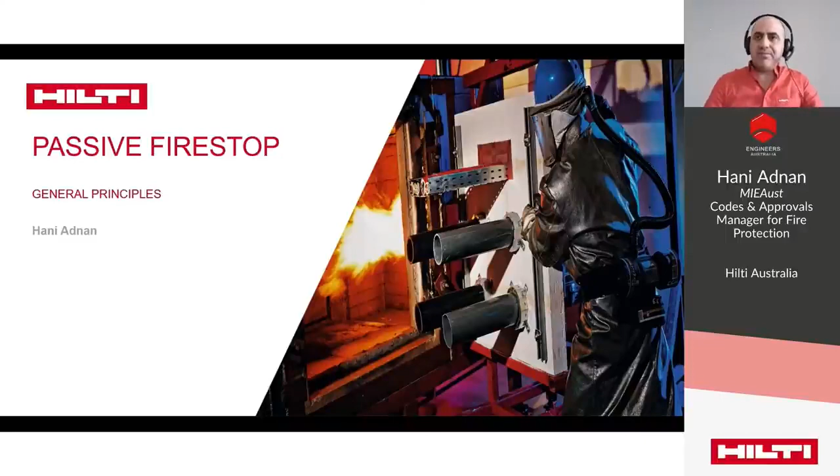Here, considering the hazard associated with these openings, as you know, the sea will begin to flow into the ship, causing a high safety risk. This will surely affect my choices, as safety comes always first and before any other objectives. And absolutely, nobody wants to end up in a sinking boat.

Now, same in relation to building construction. Openings in walls and floors have another set of hazards associated with them, such as the spread of fire, the spread of smoke, general stability, and so on. However, the objective remains the same: saving lives, protecting assets, and improving structural performance.

Now, passive fire stopping systems highly depend on the compartmentation designs. The compartmentation, or what sometimes people call fire zones, is a globally applied principle for fire safety. It's well covered as well in the National Construction Code 2011 under Part CP2, where every building will be constructed in such a way that in the event of fire, flames and smoke are limited from spreading within the building.

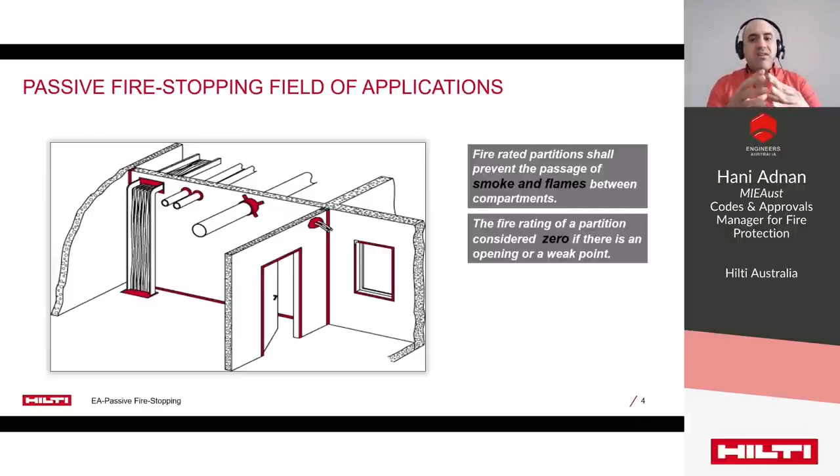Now, as you're all aware, services, utilities, and construction joints sometimes penetrate fire-rated walls or sometimes penetrate fire-rated floors. These openings are weak points that can affect the overall performance of the fire compartmentation if they are not sealed. Passive fire stopping materials play a big role here to close these penetrations and to maintain the original integrity of the designed fire compartmentations.

Passive fire stopping can be divided into three different categories. The first one is a through penetration, basically an opening in a fire-rated assembly, such as a fire-rated floor or wall, where services passing through need the integrity of the wall or floor to be maintained.

The construction joint is the second type, and it's basically any joint, whether static or dynamic, between two fire-rated elements. For example, joints between floor-to-floor configuration, wall-to-wall configuration, or the joints between the floor and the head of wall configurations. These first two, service penetrations and construction joints, are well covered in the NCC under the deemed-to-satisfy provisions C3.15 and C3.16.

The third category is perimeter joints, sometimes called curtain wall joints. Again, it's any joint, whether static or dynamic, but this time between a fire-rated floor assembly and a non-rated exterior wall assembly. Unfortunately, we don't yet have any deemed-to-satisfy provision for it in the local building code, nor a local testing standard procedure, although international testing standards exist, such as American standard ASTM E2307 or European standard EN 1364 Part 3 or Part 4.

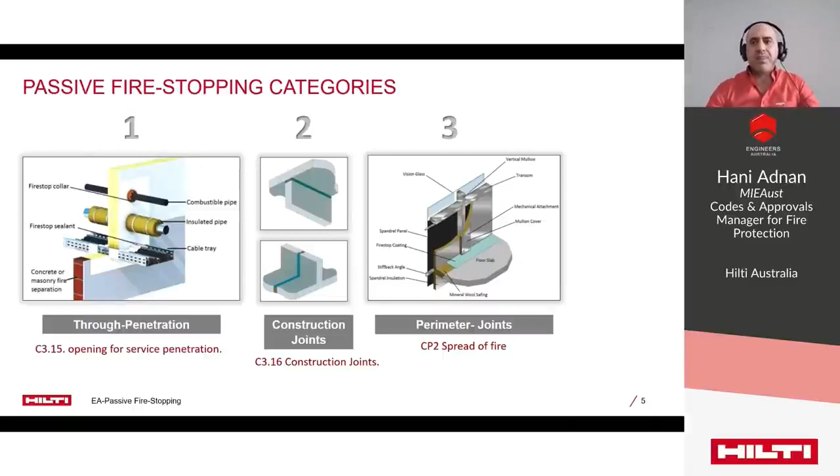Now it's also important to define the fire resistance level. Fire resistance level, FRL, as defined in the National Construction Code, is grading periods in minutes determined in accordance with Schedule 5 - we'll cover Schedule 5 later - for the following criteria: structural adequacy, integrity, and insulation.

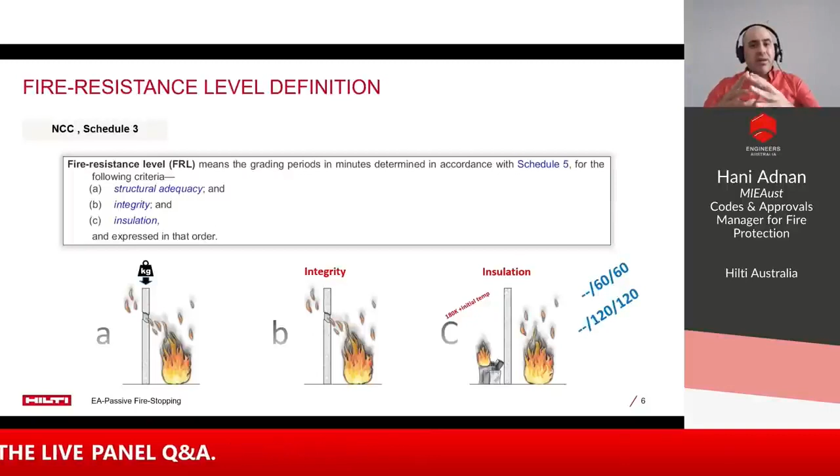Structural adequacy means the ability to maintain stability of the load-bearing capacity when we do the fire test as determined by the testing standards. Integrity means the ability to resist the passage of flames and hot gases as specified in the testing standards. And finally, insulation means the ability to maintain a temperature on the surface not exposed to the furnace - the temperature on the other side of the fire should be maintained below a certain limit specified in the testing standards.

Now, with regards to passive fire stopping systems, it doesn't require a structural adequacy rating, as it's not considered a load-bearing element. Therefore, it shall have the second and third gradings, integrity and insulation rating.

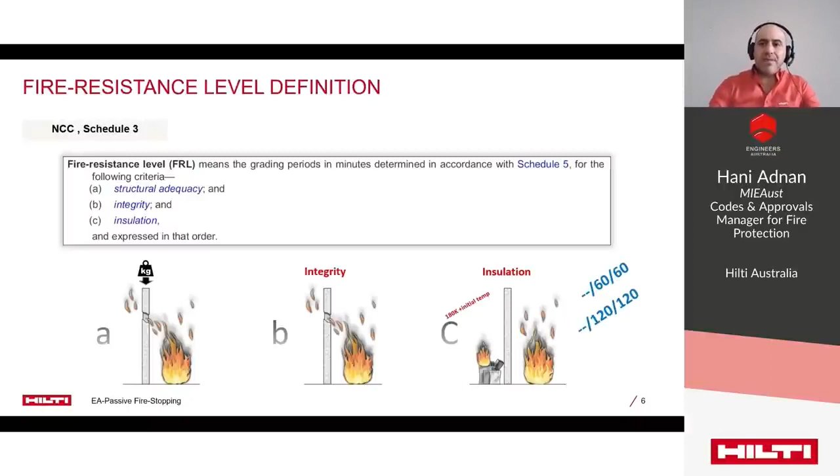A fire test is basically the way of determining whether the fire protection product meets a minimum performance criteria as set out in the building code or other applicable legislation, and must be conducted in laboratories holding national accreditation for testing the same type of application. For example, the accreditation body here in Australia is NATA.

Also, additional safety measures are mandatory in some standards. Take the American standards as an example - ASTM E814, which is equivalent to AS 1530 Part 4, used for through penetrations. It requires what's called a hose stream test, applying highly pressurized water on the tested specimens following the fire test, to measure the level of impact resistance of that burned sample, which makes it really hard to pass this standard in general.

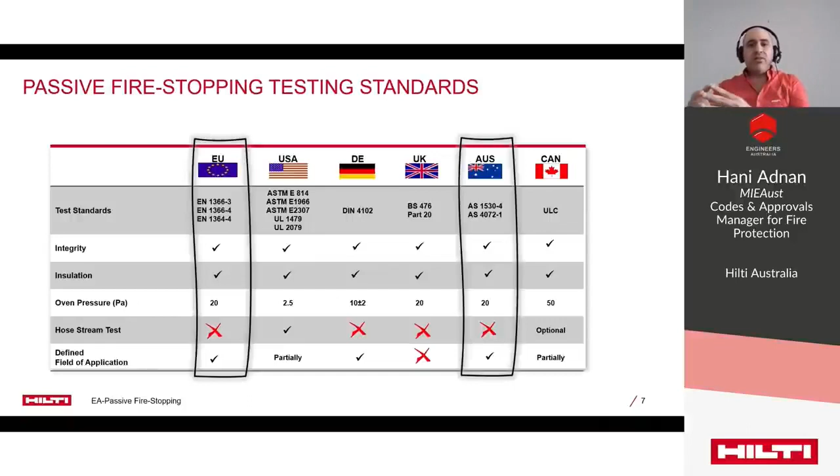In Australia, the first important testing standard for passive fire stopping systems is AS 1530 Part 4, method of fire test on building materials. The scope of this standard is to provide a way of determining the fire resistance level for different building elements, including passive fire stopping systems, to provide a uniform set of heating conditions and testing procedures for stakeholders. The testing works by exposing specimens to heat under controlled conditions in a furnace. The elapsed times at which various failure criteria occur are recorded, and then the fire resistance level of the tested building elements can be reported.

This is the first standard. Now the second important standard is AS 4072 Part 1, which sets out the minimum requirements for construction, installation, and application of fire resistance test results, specifically for service penetrations and control joints. This standard must always be used in conjunction with AS 1530 Part 4. Basically, AS 1530 Part 4 sets how to do the fire test, and AS 4072 sets how to utilize and apply the results. AS 4072 also provides the basis for permissible variations and assessment requirements. In short, AS 4072 Part 1 provides the field of application rules for what's being tested to AS 1530 Part 4.

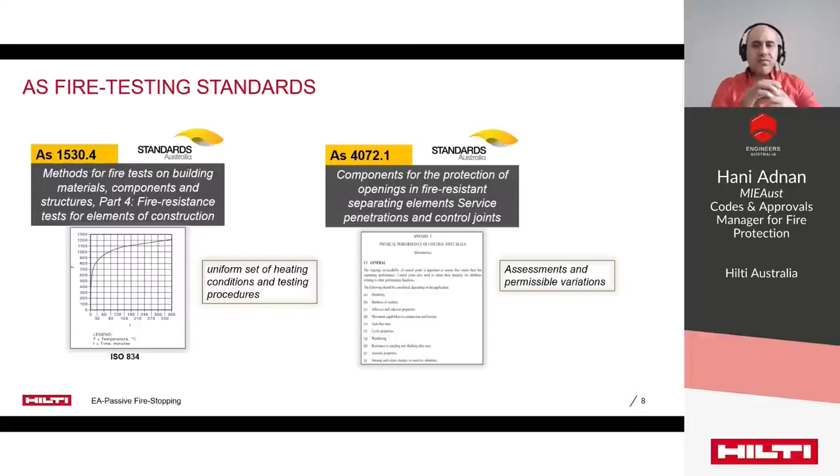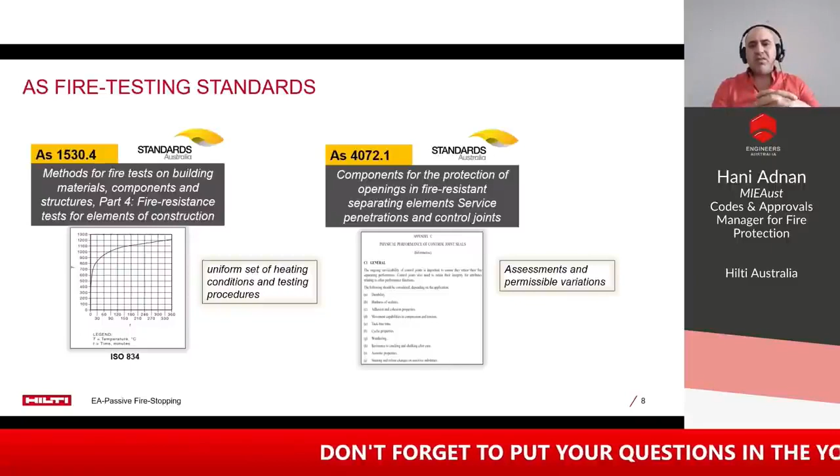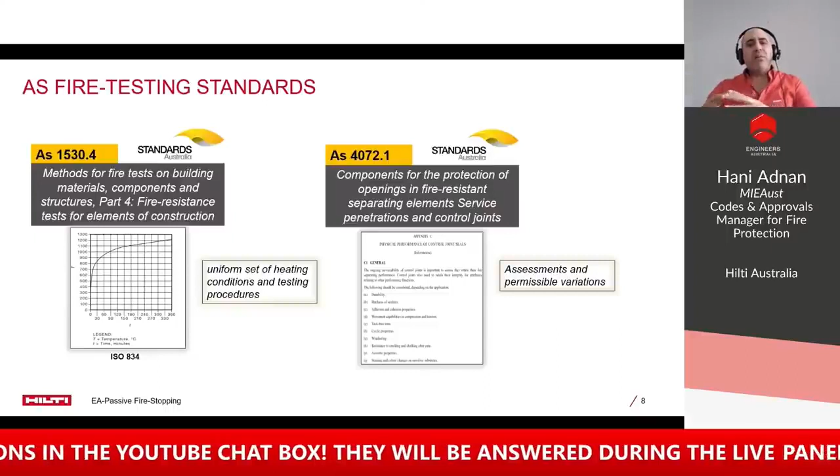Finally, standards like AS 4072 Part 1 have another important informative section we shouldn't overlook, such as Appendix C, physical performance of control joint seals, which provides more details on additional requirements beyond fire resistance testing for those sealants. This appendix will be covered later on in today's webinar.

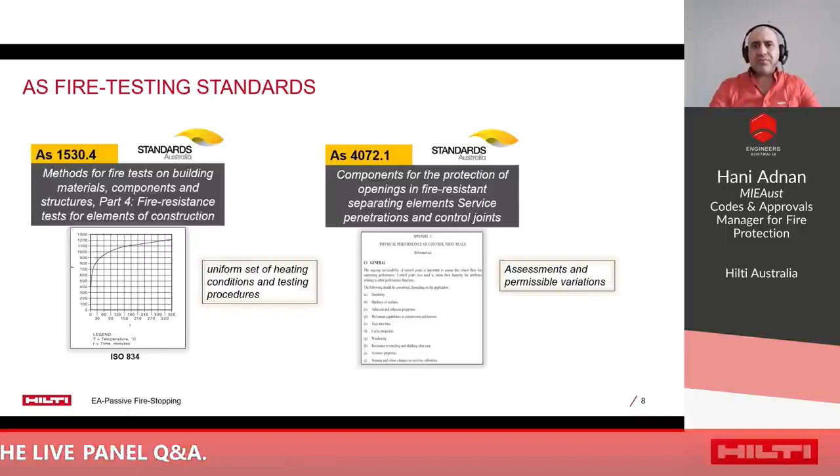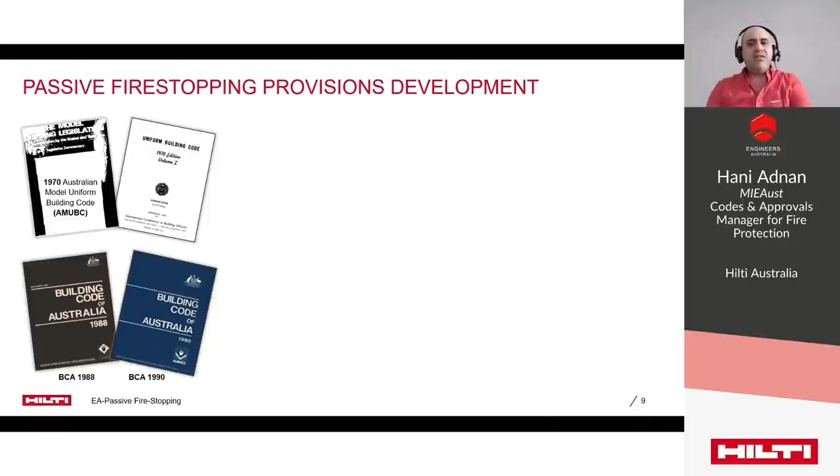Fire stopping provisions in the current NCC are a result of many years of progressive development in this field. In the 70s, building code development in the United States, Canada, Australia, and Germany began reflecting interest in fire protection in general, providing basic design requirements related to compartmentation rules, recommendations on using non-combustible materials, and special recommendations such as the use of a protected shaft to pass combustible services like cables and wires.

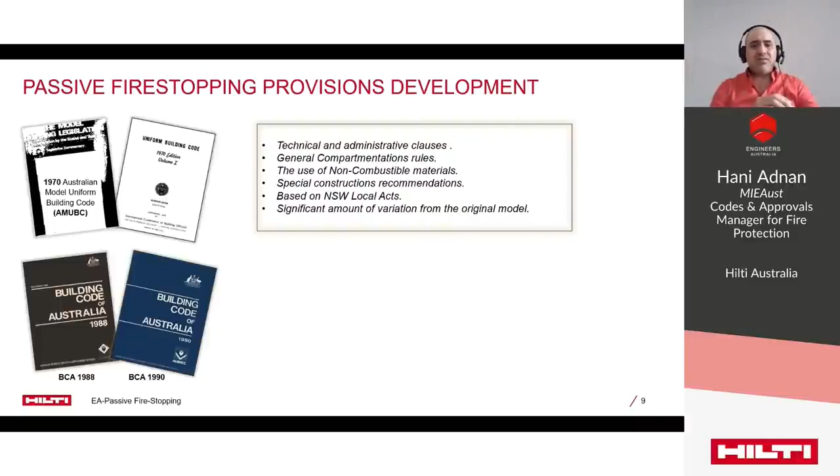The Australian Uniform Building Code was based on the New South Wales Local Government Act, which caused a high amount of variation from the original model, with many states and territories changing the provisions to meet their local needs and legislation. There was a clear need for a nationally harmonized building construction regulation, achieved with the first edition of the Building Code of Australia, BCA 1988, further refined in the second edition, BCA 1990. This code improved many aspects such as compartmentation and building classification rules. This code also introduced Part C, which we still have today, for the fire resistance of building elements, with a specific clause for openings for service installations in C314, and deemed-to-satisfy solutions in Part C315.

At that time, one of the main challenges for passive fire stopping application was the variation between what's being tested and the actual site configuration at the project. This is the reason why AS 4072, which we talked about earlier, provides field of application rules - for example, you test a certain configuration or size of cables, then apply that test result to other types or sizes if applicable.

AS 4072 was published only in 1992. At that time, it was really hard, or even impossible, for manufacturers to test each single parameter and configuration on a job site to AS 1530 Part 4. This left a big room for individual opinions, via sorts of judgments and opinion letters, to confirm these kinds of variations. However, these challenges were sorted out in the following editions of the BCA and the National Construction Code by referring to AS 4072 Part 1 directly.

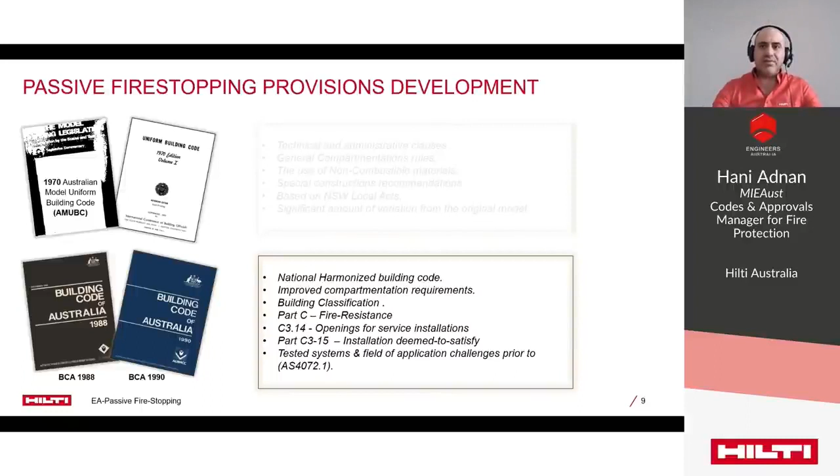Moving forward, in 1996 we had the BCA 1996 as the first performance-based code in Australia. This code set the objective and the performance requirements that must be met. These performance requirements, by the way, exist in our current NCC. I'm talking here about the NCC 2019 as well.

BCA 1996 included a performance requirement, CP8, related to both service penetrations and construction joints. It stated that any building element provided to resist the spread of fire must be protected to the degree necessary so that an adequate level of performance is maintained when openings, penetrations, and construction joints occur. And by the way, we still have the exact same performance requirement with no change in our NCC 2019.

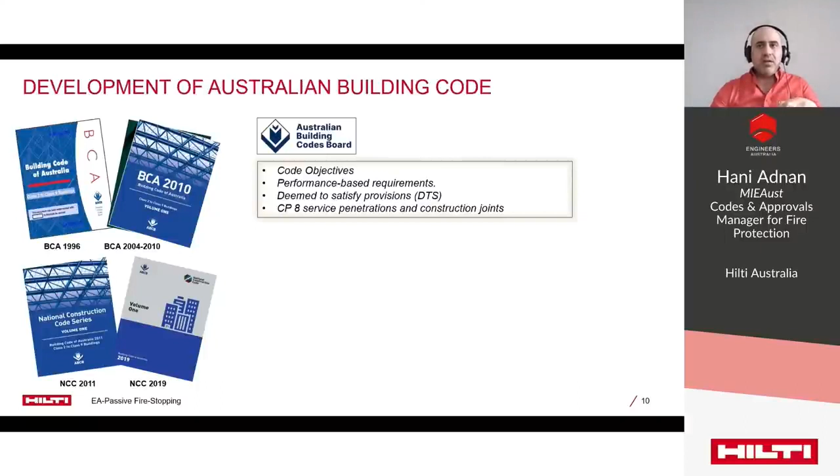Now, moving forward, before 2011, the Plumbing Code of Australia, or the plumbing regulation in Australia in general, had been developed in alignment with the state and territory water and sewerage authorities. And most regulations were based on British standards and requirements.

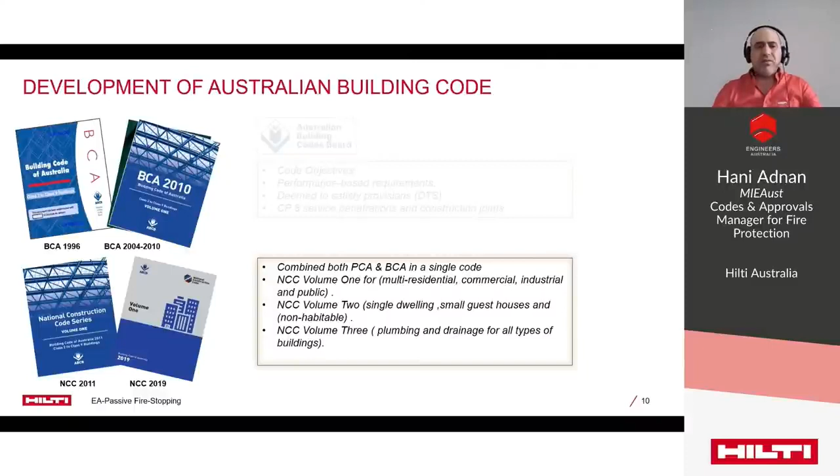Then in 2011, both the Plumbing Code and the Building Code came into one single code, the NCC 2011, with 3 volumes. Volume 1: multi-residential and public buildings, which is highly relevant to passive fire stopping systems. Volume 2: small and single dwellings and non-habitable buildings. And finally, Volume 3 applies to plumbing and drainage for all types of buildings.

Now, if we look at the National Construction Code today, the NCC 2019, in comparison to the first release version of the BCA, it had a major improvement from all aspects with regards to the regulations of passive fire stopping systems. It also has an improvement in terms of the accepted evidence of suitability and the assessment methods. I'm not going to cover this now, as it will be part of other sections of today's webinar.

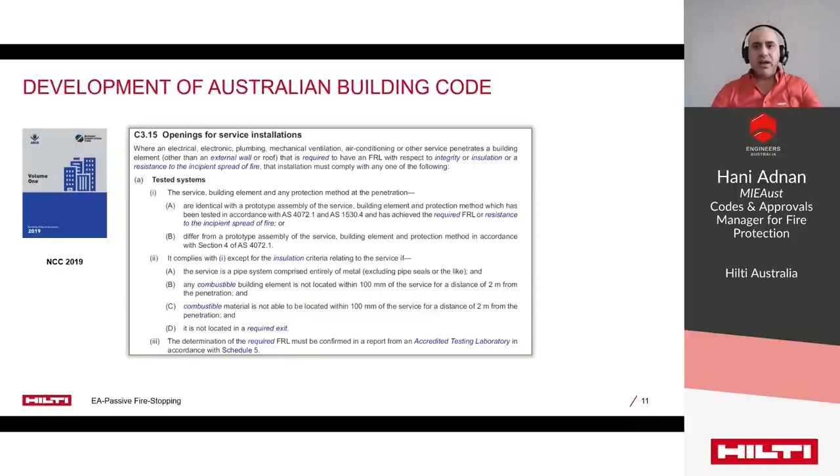But I wanted to highlight this extract from a deemed-to-satisfy provision, C315, openings for service installations, tested systems, which clearly defines the field of applications, compliance requirements, and the reference standards. It refers primarily to AS 1530 Part 4 and AS 4072 Part 1. This DTS helps manufacturers, designers, and certifiers refer to a comprehensive document to maintain code compliance solutions while providing a design or even reviewing passive fire stopping proposals.

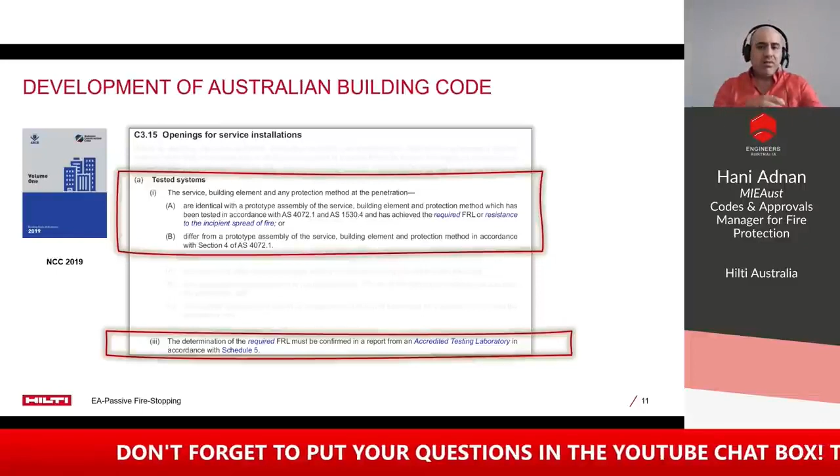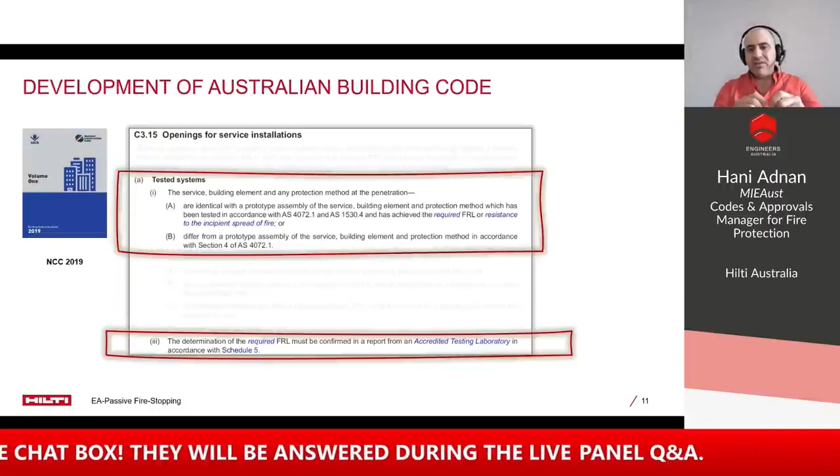This NCC also includes deemed-to-satisfy provisions for ventilation and damper systems, and a specification DTS path for passive fire stopping systems, which was basically carried forward from the previous Australian codes, providing more flexibility and more choices for compliance paths.

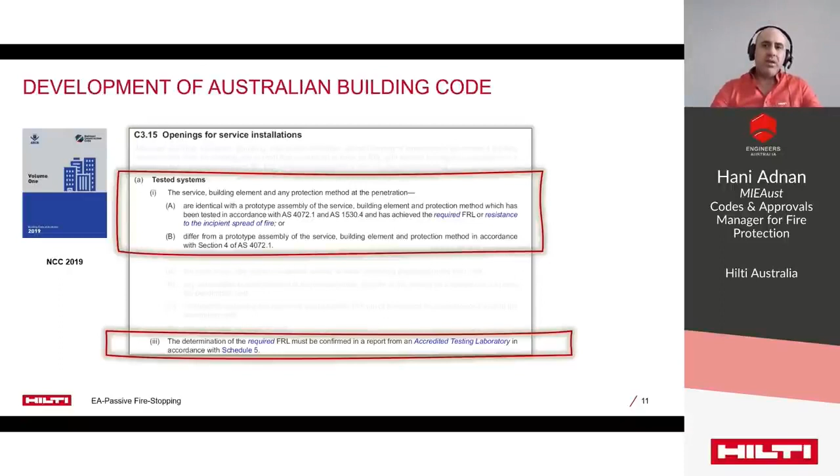But finally, I really want to say thanks to Schedule 5 in the NCC, which sets out the procedure for determining the fire resistance level of building elements and helps reduce judgments and opinions in this field, moving more towards a testing and assessment approach, where basically a building element meets the requirement of this schedule if it is identical with a prototype that has been submitted to the standard fire test or an equivalent or more severe testing standard. The system must be confirmed in a report from an accredited testing laboratory.

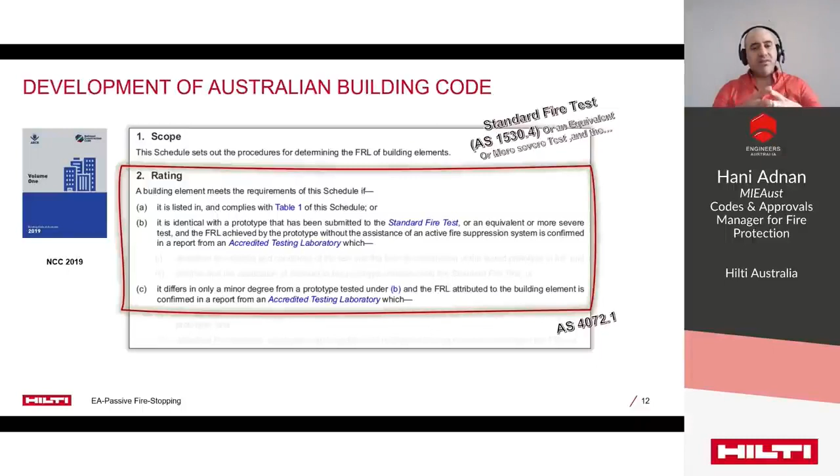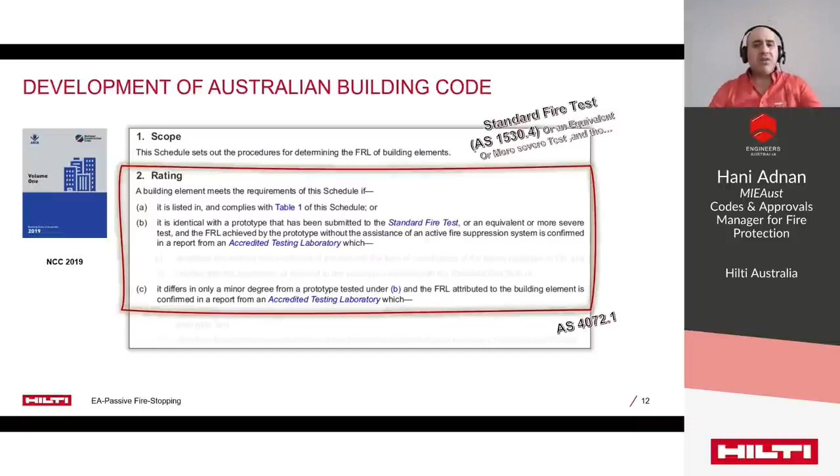If the fire test differs in minor degree from the prototype specified, then the fire resistance level still needs to be confirmed by an accredited testing laboratory. And as we said earlier, such allowable permissible variation rules can be found in AS 4072 Part 1.

What has been presented in the previous slides are just some of the key elements and key milestones, and for sure we didn't cover the entire reform in the passive fire stopping regulations. A lot of great work happened in the past decades, and there is still need for more development and enforcement in coming years, especially with regards to design, installations, conformity, and third-party approach.

But only one thing didn't change and won't change over the years, and that is the objective of saving lives, protecting assets, and improving building performance through a balanced fire protection approach, utilizing the different types of fire protection measures in order to enhance the fire safety level.

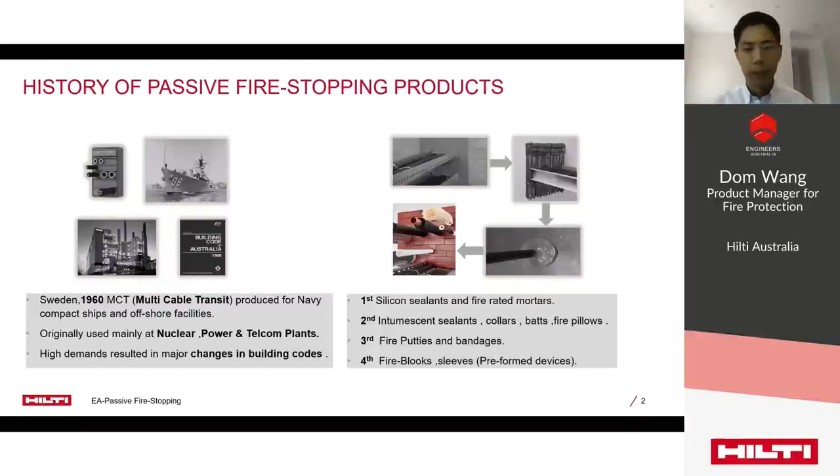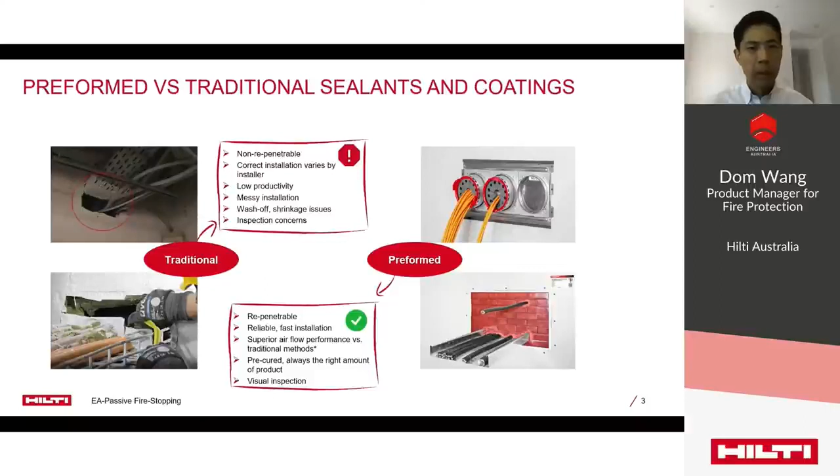For example, on the left we see more of a traditional practice in dealing with cable penetrations. Pillows and coated mineral board are usually used here, where preformed devices have been developed for the same application. Comparing to the traditional practice, the engineered preformed solutions generally provide higher quality of installation, are more reliable, easier to inspect, and result in less wastage.

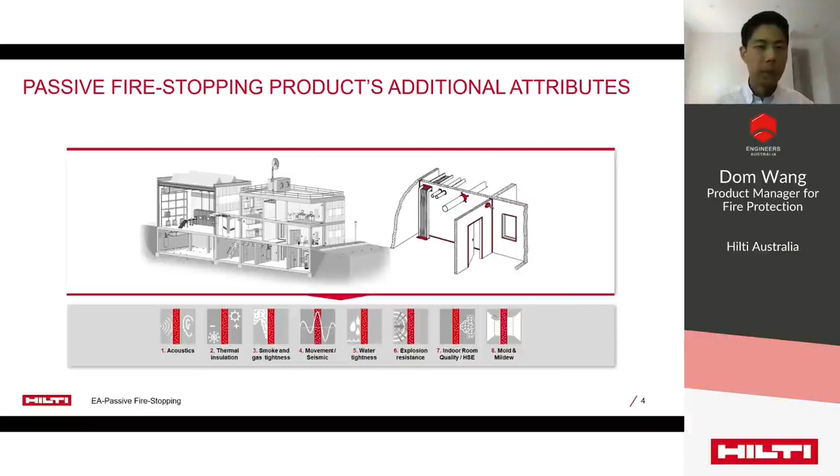The firestop product can contribute beyond fire rating. The new generation of products are developed to bring in additional attributes, which can add great value to projects. These projects can be standard ones like residential and commercial, or more sophisticated ones, for example healthcare projects and data centers.

The local standard is also calling for additional attributes for firestop products. Appendix C of AS 4072.1 is sometimes overlooked when selecting firestop solutions for construction joints. This informative section states that construction joints need to retain their integrity for attributes relating to other performance functions, including, for example, durability, adhesion, acoustic property, and also very importantly here, what we're going to talk about, movement and cyclic property.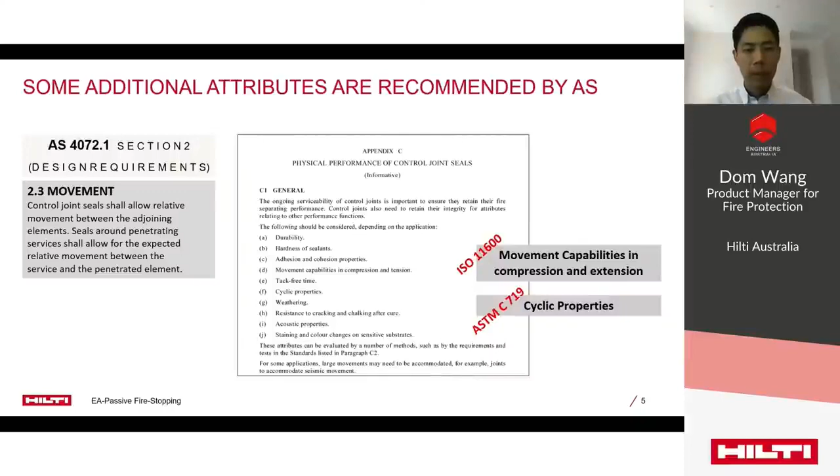The standard provides guidelines on some international standards which cover additional attributes, such as ASTM C719, standard test method for adhesion and cohesion of joint sealant under cyclic movement, and also ISO 11600, building construction jointing products, classification and requirements for sealant. The same standard also recommends the following: sealant around the penetrating services shall allow for expected relative movement between the service and the penetrated element.

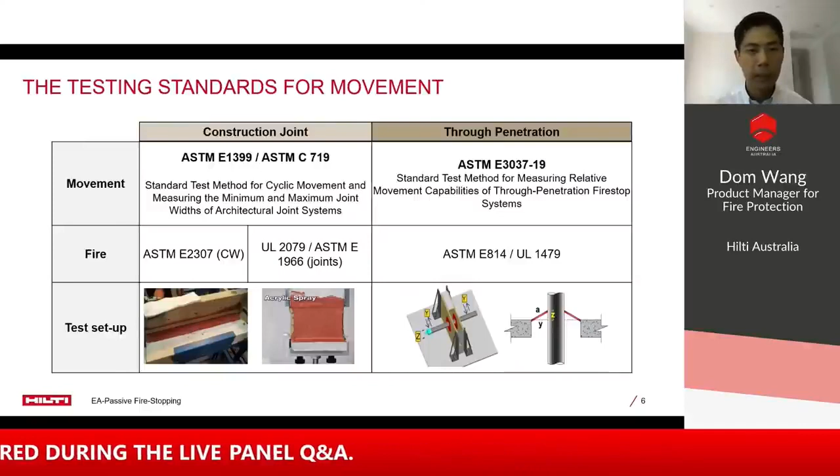So here's the list of testing standards for movement. For construction joints under ASTM setting, the movement tests need to be done in accordance with ASTM E1399 and also ASTM C719, the standard test method for cyclic movement for architectural joint systems. Movement testing is mandatory under ASTM setting, and the same movement-tested specimen will then be loaded into a furnace for the fire test.

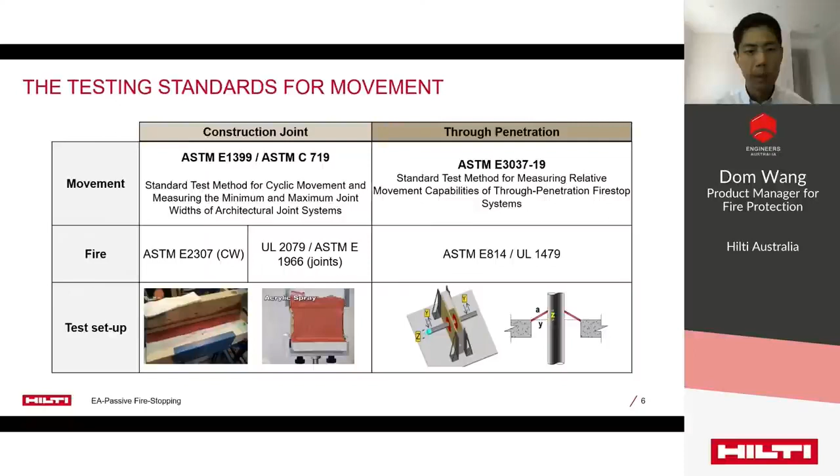ASTM E3037-19 was developed a few years ago for assessing relative movement capacity of through-penetration firestop systems. The standard is not mandatory, but this is the only available movement test standard for through penetration. I hope to explain the standard a bit further in the next few slides.

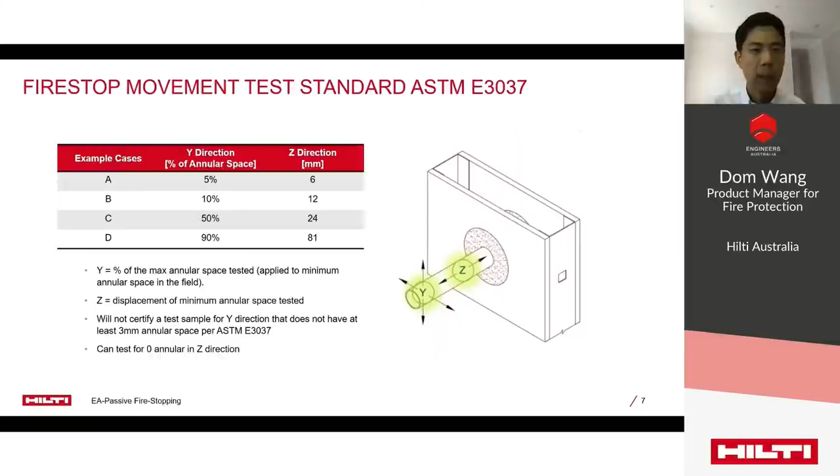So what do we mean by test conducted in 2 axes? This is a picture showing the test setup. We have movement in the y direction, which is left and right on the page, and also movement in the z direction, which is perpendicular to the separating element, creating shear strength on the test product.

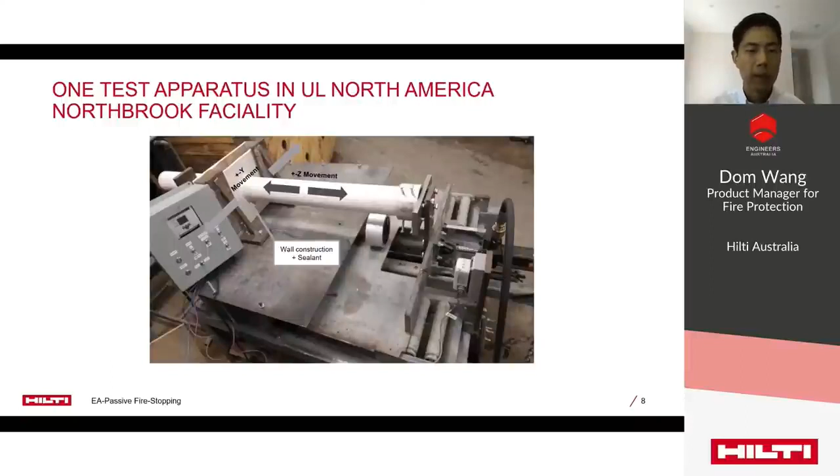Once the fire reached 150 to 180 degrees Celsius, around 2 minutes under the standard fire curve, the intumescent will start to expand and exert pressure on the combustible plastic pipe. The intumescent will grow and fill the full opening and harden to a more rigid char, completely blocking the opening, hence achieving the firestop performance.

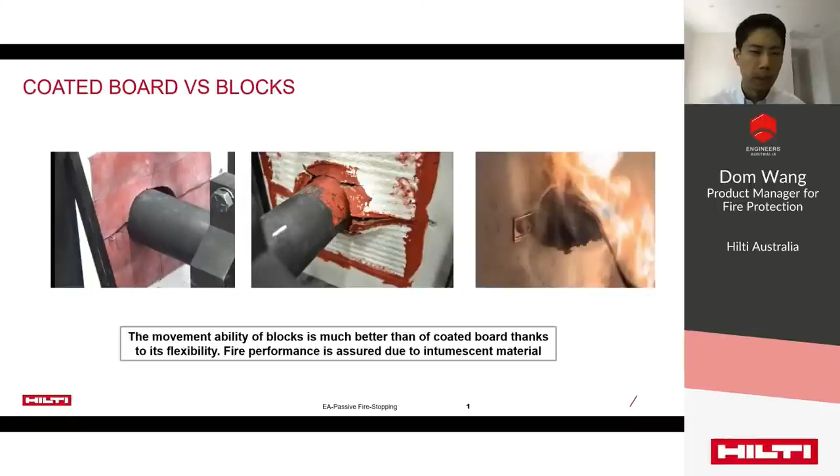In addition, if we consider data center and healthcare projects, mineral wool fiber from the coated mineral board is not designed to contribute to the clean room class. We can see that the tests in the lab show the re-penetration points risk exceeding the limit.

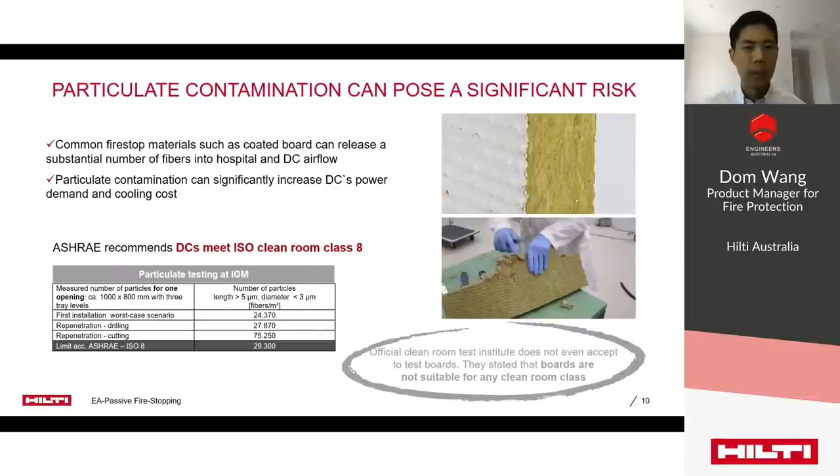The second additional attribute we would like to discuss today is the air leakage, also called the L rating. The most internationally recognized test standard for air leakage rating for through-penetration is Part 6 of UL 1479. The air rating measures the air movement through the fire assembly at ambient air temperature around 24 degrees Celsius and at an elevated temperature around 204 degrees Celsius.

The internal air pressure remains at a constant 74 pascal, and the movement of air that leaks through the firestop system is measured. According to the standard, the L rating should not exceed 5 cubic feet per minute per square foot. A rating less than 1 means good, best performance, whereas an increasing number means a decrease in sealing performance. Air leakage test is an optional test.

However, manufacturers can use this test to demonstrate the product's capacity in preventing smoke and air leakage. The L rating can then be used in product specification for healthcare and data center projects, where airflow is very essential.

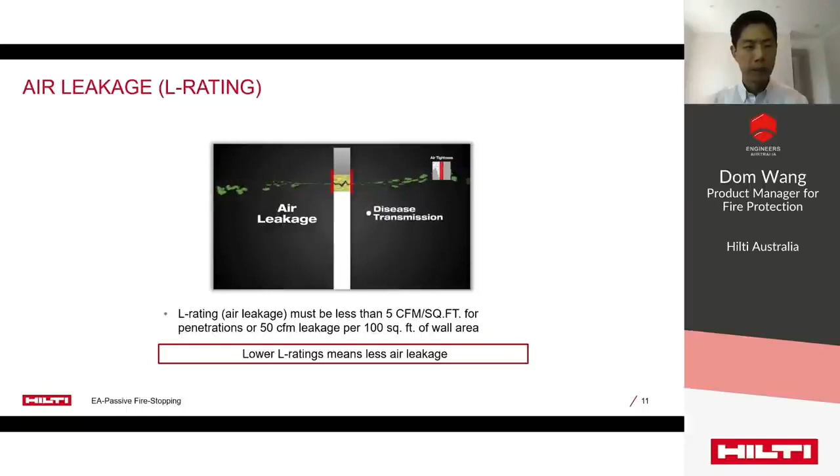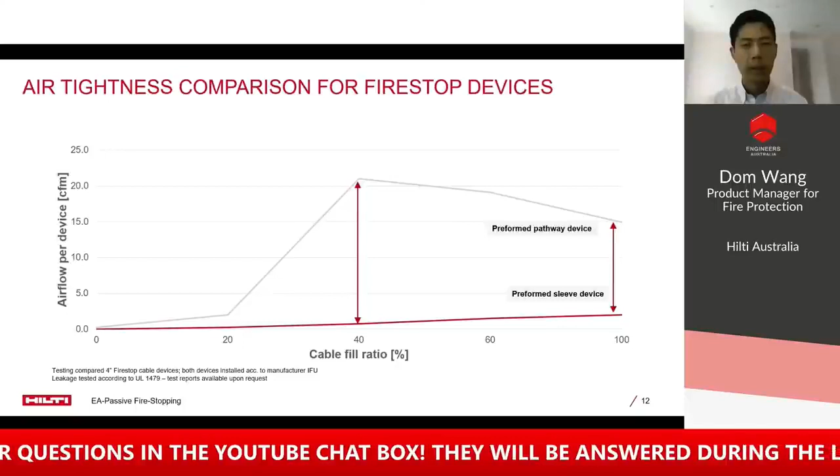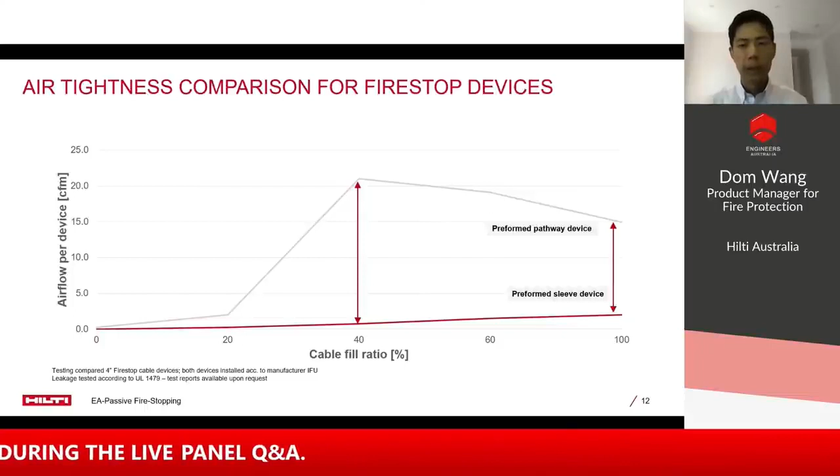The graph shows a quick air leakage test comparison between a preformed pathway device and a differently designed preformed sleeve device. As you can see, when there's no cable running through the device, both systems have very similar low air leakage rating, less than 1. But when more cables are added to the device, the air rating of the pathway device starts to climb, hence a decreased performance in stopping smoke.

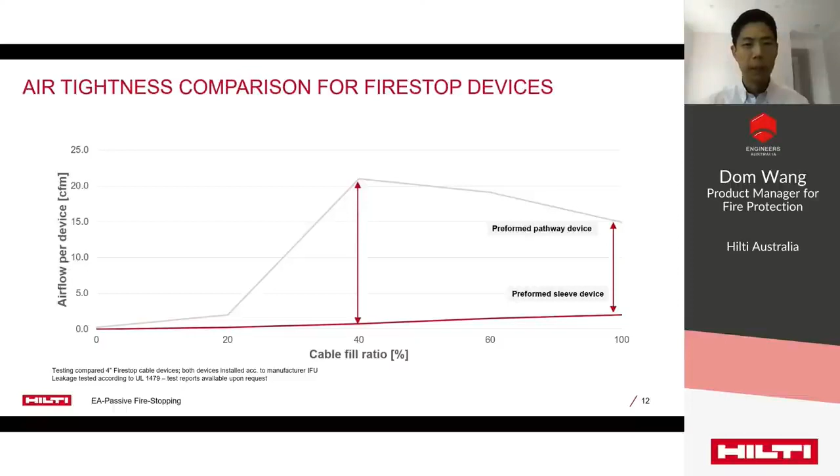In some cases, it also well exceeds the threshold of 5 cubic feet per minute. The preformed devices probably need more attention during the product development time and need to be properly designed and engineered to ensure that the product and solution is reliable and outperforms existing practice.

We also wanted to give our thoughts on firestop moving forward, as we see some great innovations locally in Australia in the past 10 years in the firestop space. And we have better enforcement now on code compliance. Apart from that, firestop solutions can be and should be more reliable.

For design, designers could more clearly define the requirements, for example additional attributes needed on the project, selecting the right products and solutions, and conduct more detailed planning. For installation, it can be carried out by trained and experienced installers, and on the product side, products can be developed to make installation easier with simpler mechanisms.

For certification, we already see documentation on digital platforms. What's probably going to happen next is how to cross-check with the design detail. All in all, the base to make our firestop solution more reliable is product conformity.

All right, thank you. That's my part. Thanks, Dom, for your insights.

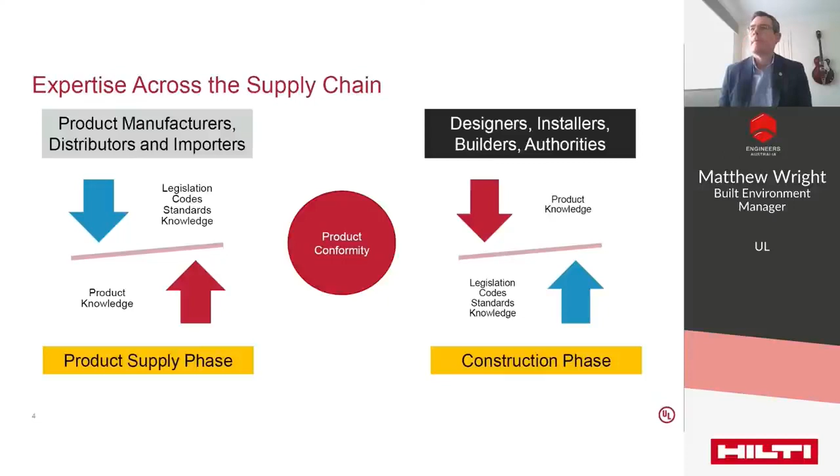However, currently a lack of confidence in this sector has emerged. The complexities associated with the supply chain, as well as regulatory expectations for product conformity, have drawn the attention of governments and industry stakeholders globally.

More focus has been applied in recent times as a result of reported product failures or incidents, particularly those associated with safety. Scathing independent reports in the UK and Australia have documented extensively the general lack of confidence in the successful implementation of codes and standards.

These reports have highlighted the importance of product conformity as the foundation of safety outcomes, which other measures like good design and the competence of practitioners rely on. If you can't trust the conformity of the product, it's difficult to have confidence in its ability to support the nominated holistic design and safety objectives it is intended for, no matter which other stakeholders are involved. Confidence in product conformity is important for all manufacturers, authorities, and end users.

You'll see on the screen here, there's two reports that I've nominated and a couple of links to those if you haven't seen them already. One's the Hackitt report from the UK, and the other is the Shergold-Weir report from Australia. Both are very consistent in relation to their recommendations and the issues that they've observed.

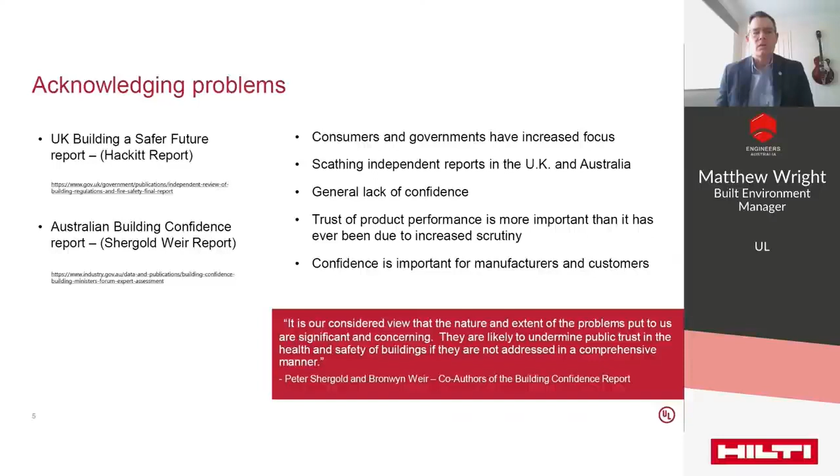There's a quote here from Peter Shergold and Bronwyn Weir, who are the authors of the Building Confidence Report, otherwise known as the Shergold-Weir report. They say it's our considered view that the nature and extent of the problems put to us are significant and concerning. They are likely to undermine public trust in the health and safety of buildings if they're not addressed in a comprehensive manner. So there's some pretty strong words in relation to the status of industry at the moment.

So here are two other quotes in relation to this from within the local industry. The first is from the Australasian Procurement and Construction Council's Guide to Achieving Compliance for Construction Products, and sums things up well: we're working in a global marketplace, there are many products that we're importing, and the most concerning consequence of construction product failure is its impact on safety. Without doubt, the use of faulty construction products puts lives at risk.

The second quote is from a Federal Senate inquiry in relation to non-conforming products, and is actually one of the recommendations of the inquiry. It calls for the Building Ministers Forum to expedite its consideration of a mandatory third-party certification scheme for high-risk building products and a national register for these products. We're not quite there yet in relation to that, but there is a lot of work happening in this space across state, territory and federal governments.

And there are some quite broad recommendations and discussion papers that have been produced by the Australian Building Codes Board in relation to this, if you care to look for those.

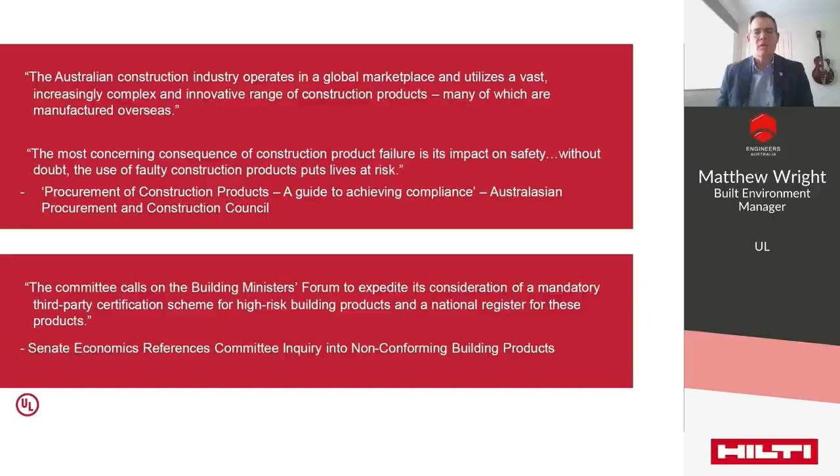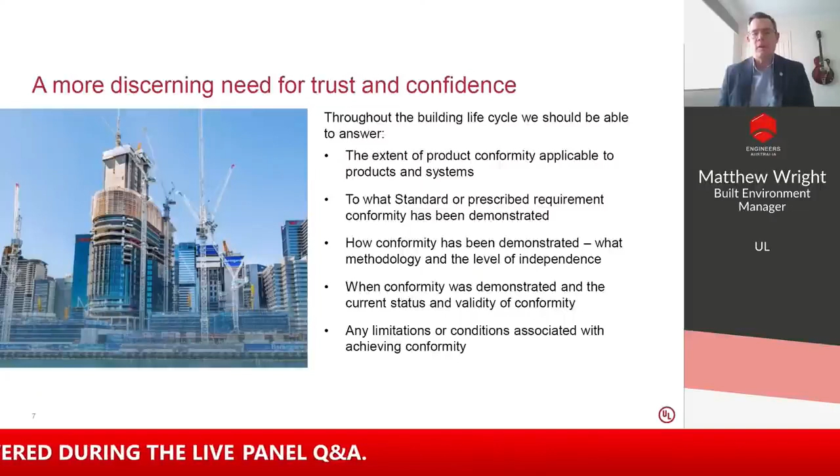Throughout the building life cycle, practitioners need to know: one, what level or extent of product conformity is required for products and systems made up of multiple products. Two, what target standard or prescribed requirement conformity has been demonstrated against. Three, what methodology has been used to demonstrate conformity and the level of independence applied. Four, the validity of any attestation of conformity - when was it issued, is it still valid? And five, are there any associated limitations with use of the product?

Right now, these questions are difficult to answer consistently for practitioners and require more education and attention.

Having outlined the broad issues, let's now shift to talking about why product conformity is the foundation of safety outcomes. Bear with me here while I change the slides.

Globally, one of the key focuses of built environment controls is to deliver improved safety outcomes that acknowledge certain measures can reduce or manage safety risks. Legislation can establish punitive or even criminal penalties if certain processes or approvals aren't sought or met. Regulations, codes and standards referenced by legislation typically outline design expectations, practitioner roles and responsibilities, and approval requirements. Design, construction and maintenance activities are tasked with implementing the expectations of approved design. Each of these measures works to reduce risk to acceptable levels. All of these functions call up or are supported by conforming product. None of these measures alone or together can achieve safety objectives without product that stakeholders have confidence will perform as expected.

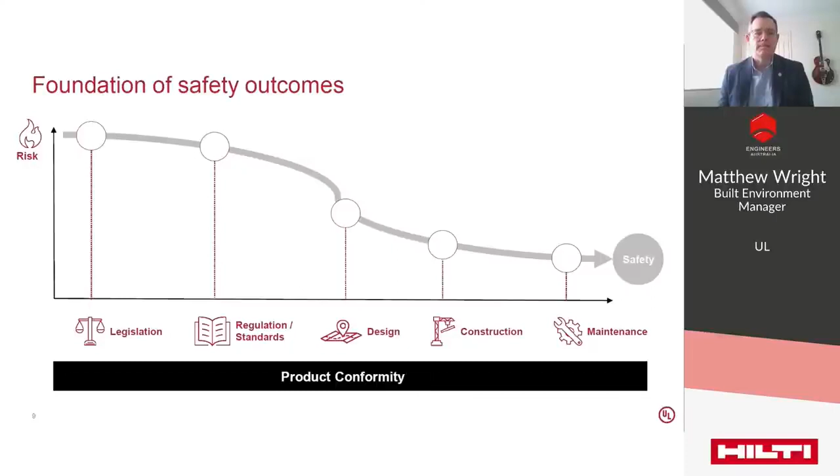Product certification is a key pillar for rebuilding trust around safety and compliance in buildings. Product certification is not to be confused with project certification or certification of an installation. It's certification of individual products or sometimes a system of multiple products.

The definition of product certification here is provided by the international standard ISO IEC 17067, Fundamentals of Product Certification and Guidelines for Product Certification Schemes. Let's read through the definition. Product certification is the provision of assessment and impartial third-party attestation that fulfilment of specified requirements has been demonstrated, and is an established conformity assessment activity that provides confidence to consumers, regulators, industry and other interested parties that products conform to specified requirements, including, for example, product performance, safety, interoperability and sustainability.

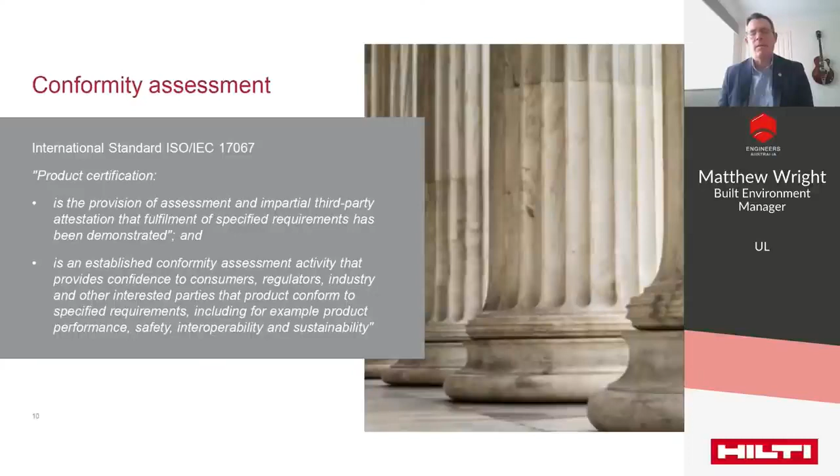The key points here are: one, impartiality - product certification is provided by someone without vested interest in the outcomes. Two, specified requirements have been demonstrated - you've hit the target, typically these are repeatable measures or product performance benchmarks. Three, delivering confidence - the reason for conducting product certification is to provide confidence to multiple stakeholders that the product conforms to established requirements. Product certification is an internationally recognised process for product conformity assessment that delivers confidence due to the independence of those undertaking the assessment and the very nature of the assessment itself.

Product certification provides value to both manufacturers and suppliers, as well as consumers and end users. For manufacturers and suppliers, it can be used to demonstrate to the market that a third party has attested their product fulfills specified requirements. For consumers and end users, it can be used to design, approve, select, or install products with confidence that they will meet specified requirements. These benefits apply throughout the building life cycle, which attracts multiple practitioners and stakeholder groups from design all the way through to routine service and maintenance.

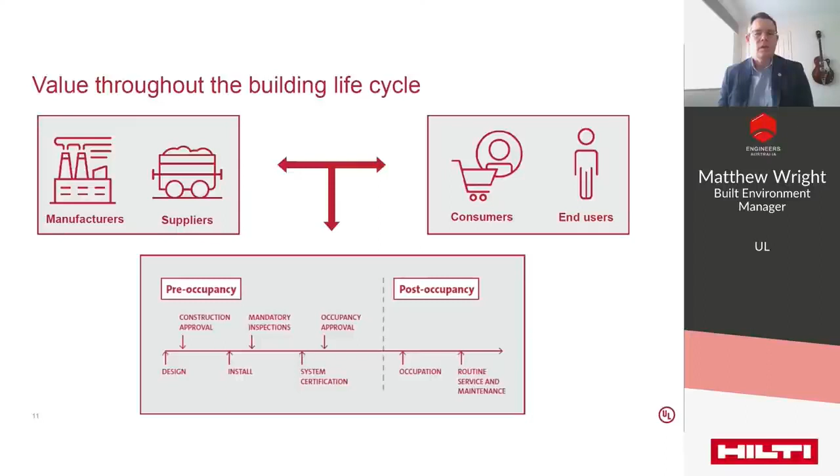So let's take a look at the current options locally. The first step in determining product acceptance is identifying the driver for conformity. What is the extent of conformity expected? Is the product use governed by legislation or codes? These may prescribe additional requirements with standards. Alternatively, the use of the product may be covered by commercial or voluntary terms alone. It's important to understand this for your specific situation.

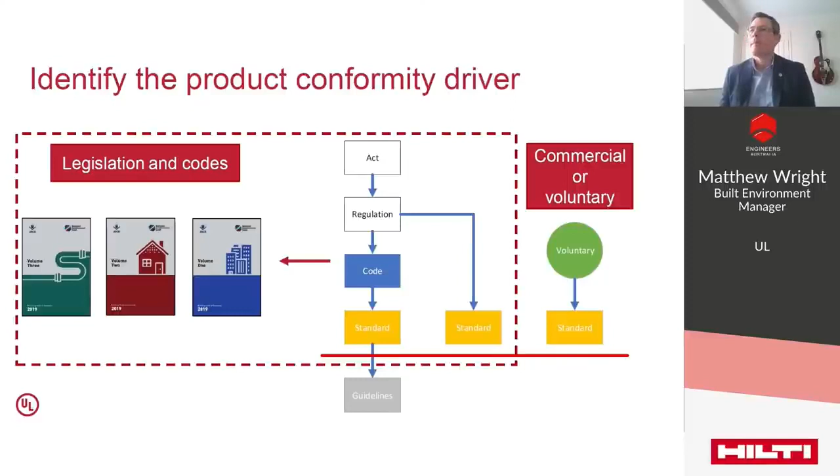In this presentation, we're going to focus on the National Construction Code, Building Code of Australia requirements, noting that the Plumbing Code of Australia has different provisions in relation to products. There are currently 6 options in the National Construction Code, Building Code of Australia volumes to demonstrate evidence of suitability for products. In addition to these, there are specific requirements in Schedule 5 for determining the FRL of building elements. These can include testing, assessment against tested product designed to prescribe standards, or a calculation method. So in addition to these 6, for building elements that require an FRL, there are some specific requirements in Schedule 5. I need to stress that.

CodeMark is a certification scheme administered by the Australian Building Codes Board, who write the National Construction Code, and is best suited to products subject to performance solutions. A certificate of accreditation is a power that some states and territories have to approve products. It's a legacy from a time prior to the National Construction Code when there were no national technical provisions, and is now rarely used, with only a couple of jurisdictions still applying it.

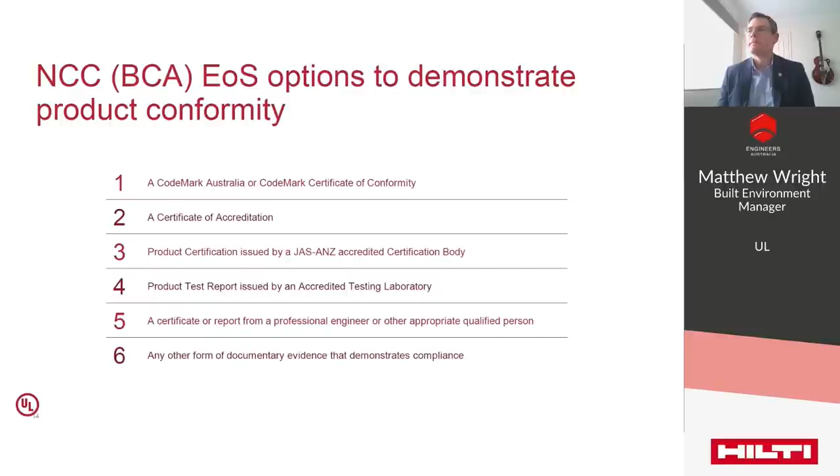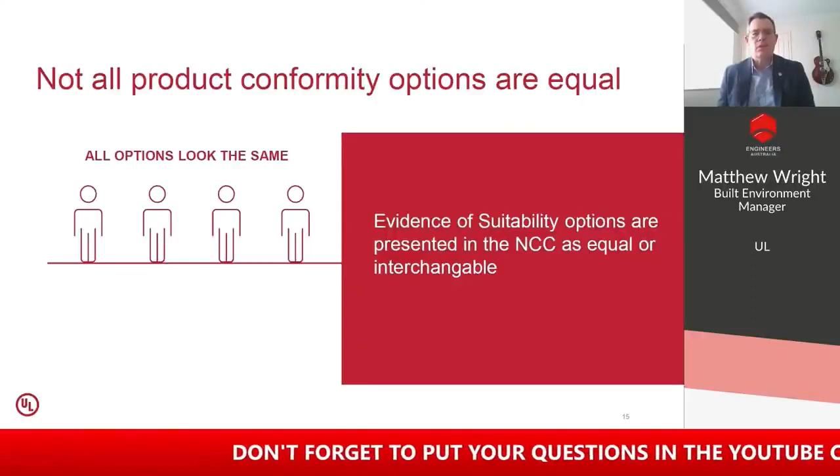This leaves options 3 to 6 from the slide here, which I'll discuss in more detail. The evidence of suitability options are presented in the National Construction Code as interchangeable. You can use them individually or in combination. This would suggest that they are equal in their level of product assessment. However, this is far from the case.

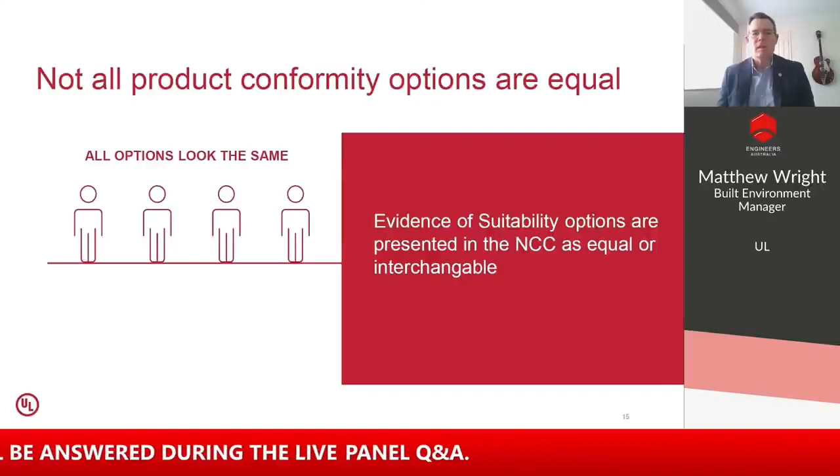So whilst they might all look the same, they are not, and there has been minimal, if any, education provided to industry on these matters since the National Construction Code, Building Code of Australia, was first introduced in 1990, despite a recent Australian Building Codes Board handbook and guide being published. There's a recent ABCB discussion paper suggesting reform that analyses the current requirements and product certification is promoted. You can still read this discussion paper online through the ABCB website.

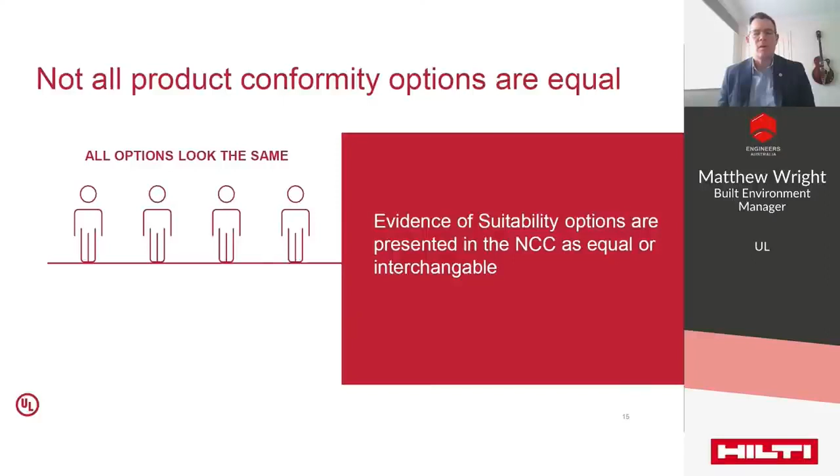So let's consider these and compare them. The first that I want to look at is any other form of evidence, or any form of evidence. It's the most flexible and does have some merit, but is extremely subjective and prone to abuse. Part of its reason for existing is to reconcile Australia's World Trade Organisation agreement on reducing technical barriers to trade.

A good use of this option would be to accept a sprinkler head, for example, that has been certified by UL in the United States to US standards that are also recognised in Australia. A bad use of this option would be the, quote, note from your mum. It puts enormous pressure on the authority accepting it, including liability if they cannot demonstrate the reasons for accepting it.

The next option is subjective opinion. This is to accept a certificate from a professional engineer or other appropriately qualified person. It isn't product certification as defined internationally by ISO. This option simply increases the threshold of competency in relation to the person providing a certificate. It doesn't necessarily determine a consistent competency threshold, and it doesn't set any consistent methodology for arriving at the decision to issue a certificate. Ultimately, whilst there is room for this option, it is still subjective opinion.

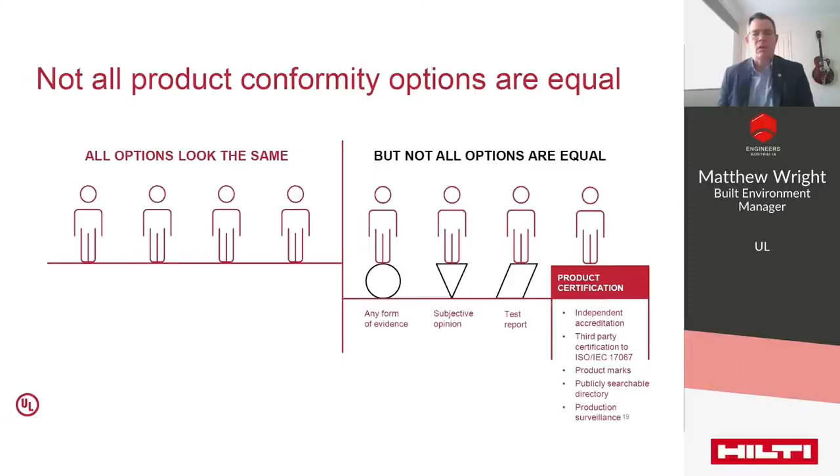Third-party certification includes multiple components that deliver the confidence industry needs. These include independent accreditation of the organisation delivering the scheme and the labs providing evaluation data that's being considered, demonstrating independent competency and capability to make impartial judgments, appropriate scheme rigor to ISO IEC 17067, the use of product marks linking physical product to certification information, publicly searchable directories that link to product certification information, and production surveillance that provides confidence in ongoing conformity of the product.

If we compare these options, we can see that the risk of non-conformity increases the further we step away from third-party product certification.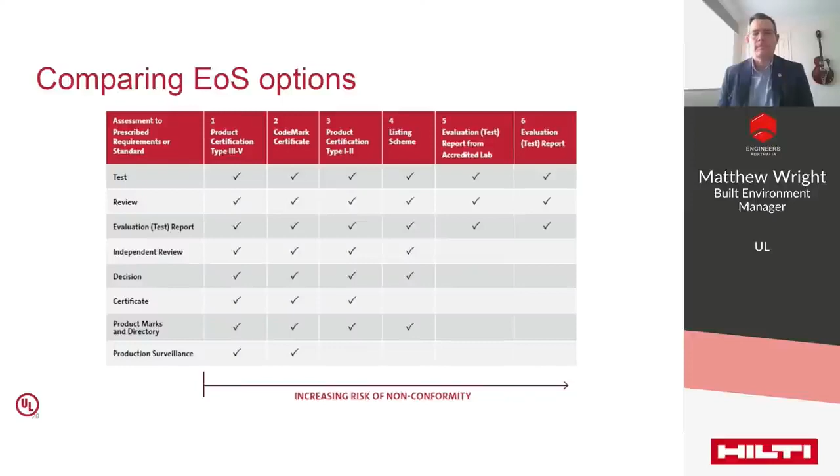Let's look at the components of third-party product certification. I think it's important that we define what we mean by third party when we talk about product certification. For context, let's compare how it relates to first and second party activities.

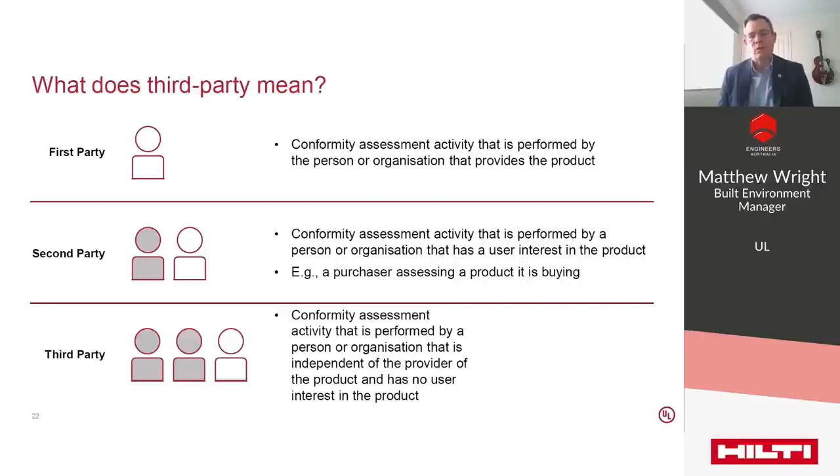First party is conformity assessment activity performed by the person or organisation that provides the product, effectively self-certification if you like. Second party is conformity assessment activity performed by a person or organisation that has user interest in the product. So this could be someone who has vested interest in the outcome and invests themselves in conducting an assessment on the product that they're purchasing. By contrast, third party is conformity assessment performed by a person or organisation that is independent of the product provider and has no user interest, therefore completely impartial and able to be relied on by multiple other stakeholders.

There'd be an initial factory audit of the product to determine the manufacturing process, and then an independent review and decision in relation to whether conformity had been achieved, and a certificate could be granted.

Granting the certificate would also allow for products to be marked, linking the physical product back to the certificate, and an online directory so that other stakeholders could access this information. This would be complemented by ongoing production surveillance of the product.

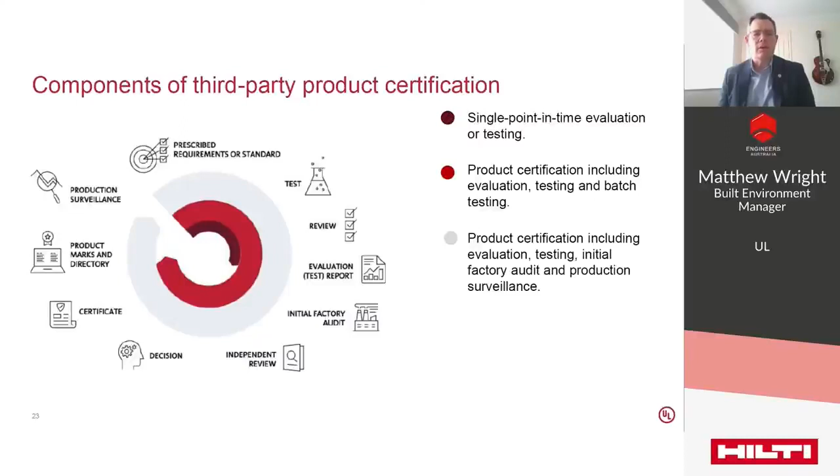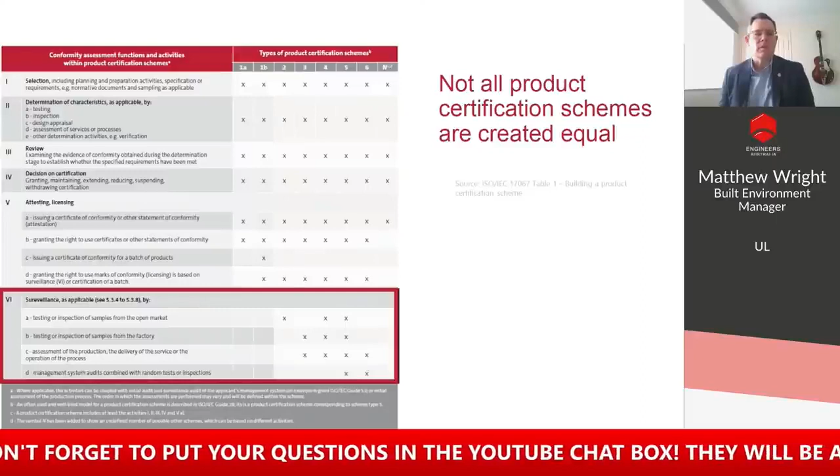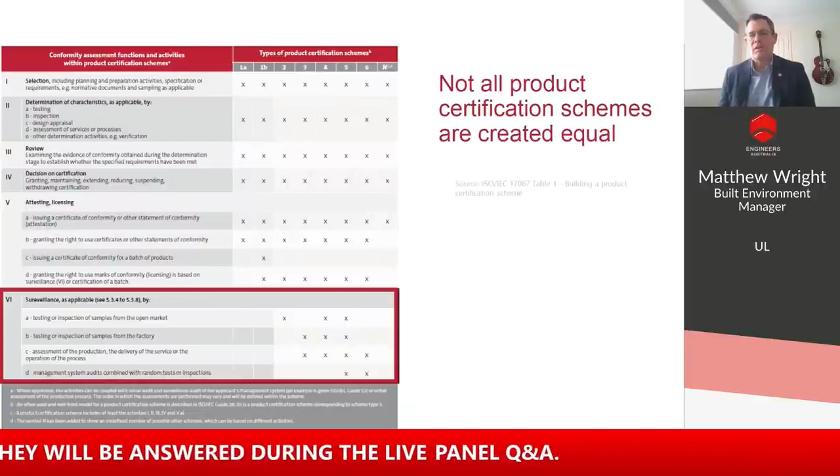This table is drawn from the standard ISO IEC 17067, in fact Table 1, and presents the types of conformity assessment functions that can be assembled to make up individual schemes. These include selection, how characteristics of the product are determined or evaluated; review, decision-making on certificates; and how attestation of conformity is provided, which could include documentation and license use of product marks.

The columns to the right-hand side of the table indicate how the assembly of these different components could result in different scheme types. I'd like to draw your attention to section 6, which I've highlighted here in the red border. This relates to production surveillance and the number of ways it could be undertaken.

This includes: 1, testing or inspection of samples from the open market; 2, testing or inspection of samples from the factory; 3, assessment of the production, the delivery of the service, or the operation of the processes; or 4, management system audits combined with random tests or inspections.

Note that product certification scheme types 1A and 1B are separated from types 2 to 6 on the basis that they do not include production surveillance activities.

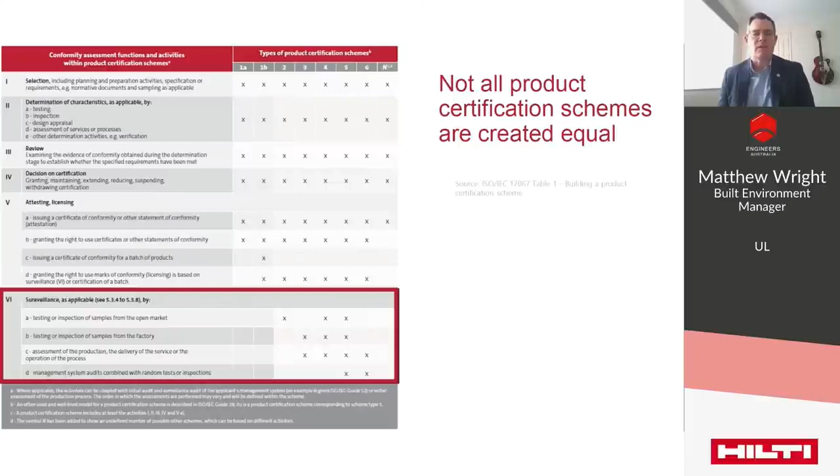Production surveillance is a key hallmark of the more advanced product certification schemes and provides value to product manufacturers and end users alike. It can be provided in a number of formats in order to independently assess that the manufacturing process is continuing to produce conforming products.

So it could include surveillance of the manufacturing, processing or formulation of materials at the point of manufacturing. It frequently includes random selection of raw materials and/or finished products for quality checks at specified intervals. It may require audit testing in an independent accredited lab to confirm product performance, and it must be conducted by a recognised provider of such services.

It must be conducted by a recognised provider of such services. Factory product control and auditing must be performed by an ISO 17065 or ISO 17020 accredited provider.

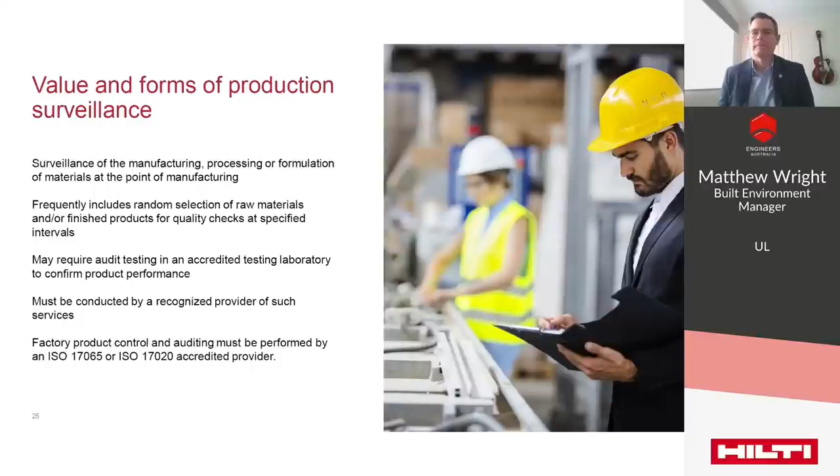Those two pieces of information would be considered for review and a certification decision made. If the product was deemed conforming and successful, a certificate would be issued for that, and the product would be able to be marked and placed on a directory or a listing with that certificate for public viewing of that information.

Rather than stopping there, there is an ongoing feedback loop beyond that initial certification to continue doing production surveillance of the factory over the lifespan of the certification, to make sure that it's current and still in place, and that product certified by this process continues to conform.

So you can have confidence that the product turning up on site is going to conform as assessed by this process.

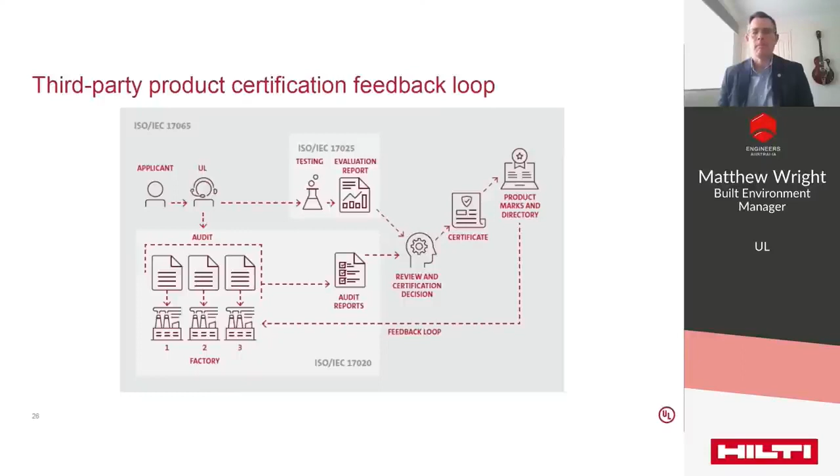So next, I'd just like to highlight some advantages of third-party product certification.

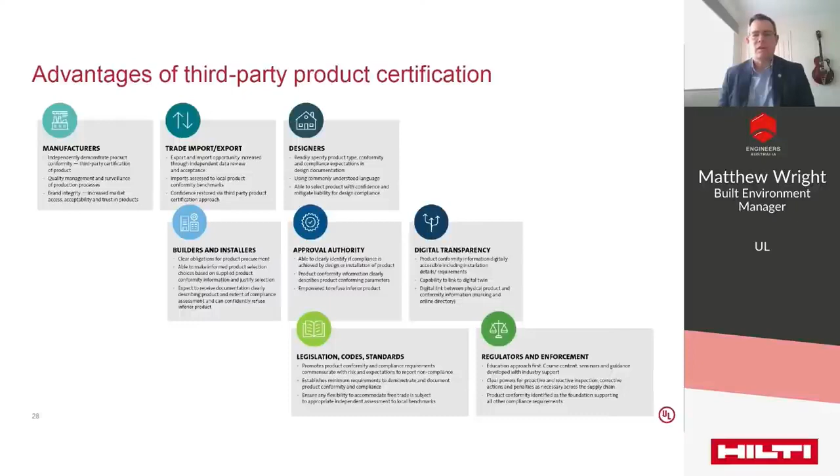From a legislation, codes and standards point of view, certainly distilling the requirements down and being clearer about which products or which type of risk require which types of conformity information would help the industry and also help regulators applying the codes and standards and their enforcement activities.

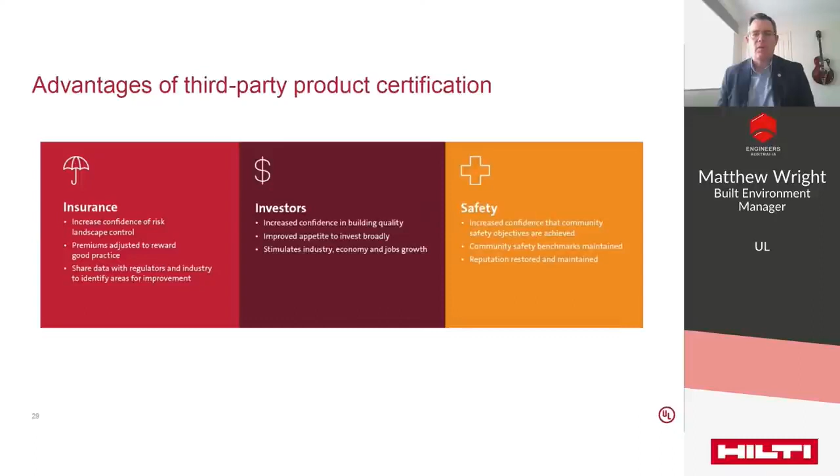Ultimately, though, our aim with third-party product certification is safety, increasing confidence that the community safety objectives have been achieved, and restoring our reputation and maintaining this for quality and compliance.

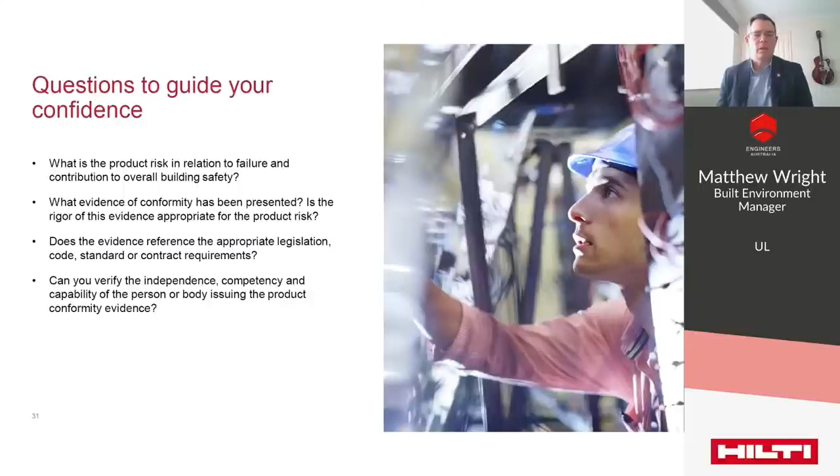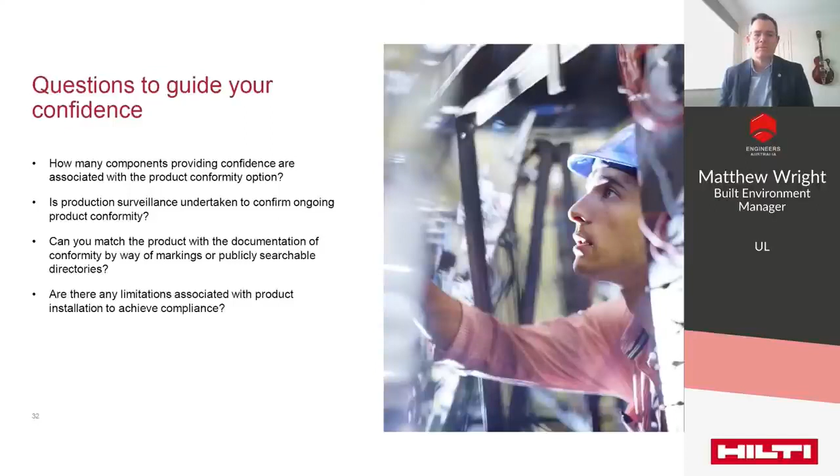So that's the end of the presentation for me. I hope you've got something out of that, and I wish you well on your journey to determining product conformity. Thank you very much.